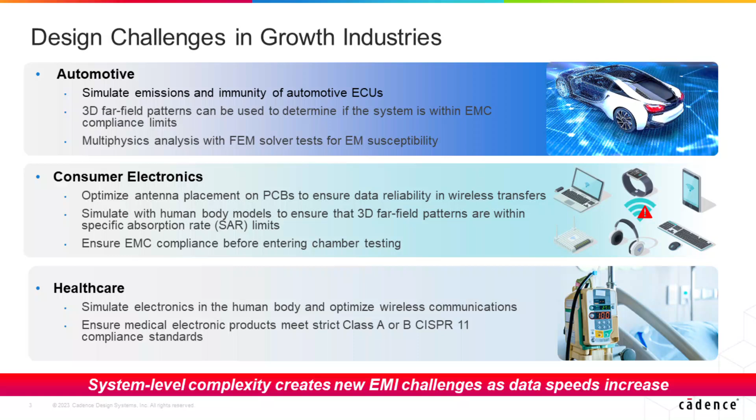Healthcare industry. Simulate electronics in the human body and optimize wireless communications. Ensure medical electronic products meet strict Class A or B CISPR 11 compliance standards. System-level modeling must advance with industry demands. So designers require new technologies for 3D electromagnetic compliance simulation.

I've heard a lot of times from my customers that they just don't have a good path to full system simulation for EMI, so they put emphasis on prototypes or pre-compliance checks. Introducing simulation would help a lot to establish a predictive EMC design-side process for analysis of EMC issues. As the outcome, of course, we would have fewer expensive prototypes.

Accelerated time to market requirements require physical prototype testing be replaced with simulation. Test measurement accuracy is required from simulators. We need scalable computing solutions. Legacy tools with old architecture scale poorly and require multiple machines with terabytes of memory to provide any level of acceleration.

It's very important to have integration with implementation tools, because if we use only point tools, this requires painful extra steps to correct design problems. Accurate, timely, cost-effective solutions are what is needed in the industry, versus inefficient simulations that take weeks to complete on expensive, dedicated hardware.

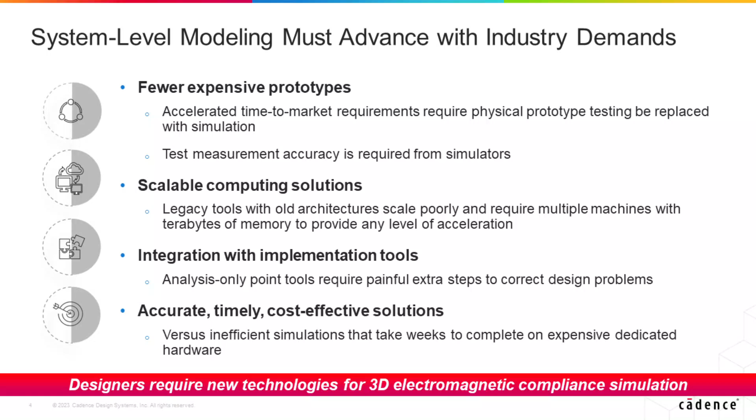Clarity 3D Transient Solver gives test measurement accuracy and extreme performance. This tool is capable of massive parallel execution: multi-threaded, distributed processing, cloud-ready. It has virtually unlimited capacity. Large system simulations can be addressed with as few as 8 cores and 1 GPU. Add more cores or GPUs for nearly linear scalability. No loss of accuracy; with all this massive parallel execution, accuracy is guaranteed.

You can see on the right side that Clarity 3D Transient Solver is used as a global solver which can address very large problems. If we look at the PCB or IC package for local field creation, we can use the Clarity 3D finite element solver, but the Clarity 3D FDTD Transient Solver is used as a global solver, which gives a good prediction of the far EM field so EMC compliance can be checked, while the near fields can be checked properly using Clarity 3D finite element.

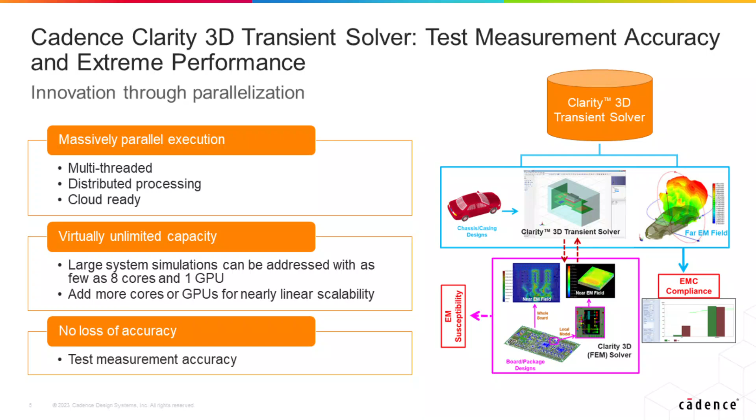Using the 3D FDTD solver, we can predict EMC and EMI problems associated with ECU designs, PCB plus mechanical chassis. We can solve various EMC and EMI problems associated with devices operating in a complex environment, including chambers, PCB boards, and much more.

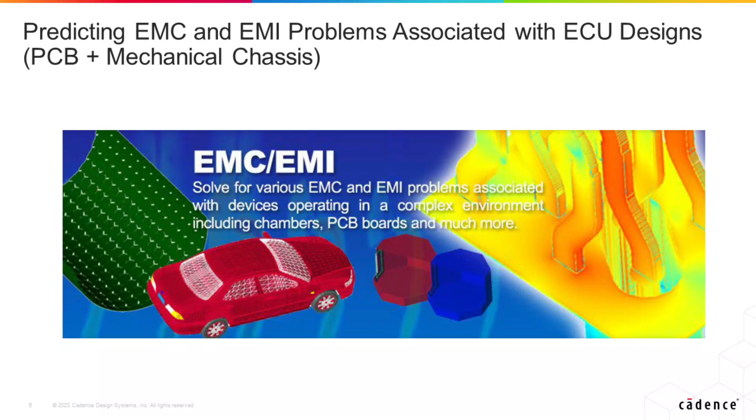I will give an example about optimizing the hole pattern for an ECU chassis using our 3D FDTD transient solver. Clarity Transient Solver was used to optimize the mechanical chassis. First, the STEP file of the mechanical chassis was imported into Clarity Transient Solver. After importing the STEP file, each part of the geometry should be associated with the proper material from our material library, which describes the electrical performance of each material defined in this system constellation, PCB plus mechanical chassis.

Here you can see a zoom showing the mechanical hole pattern originally placed on the chassis. In the first step, we will check the performance and which fields, at which critical frequencies, are leaking out through these mechanical holes.

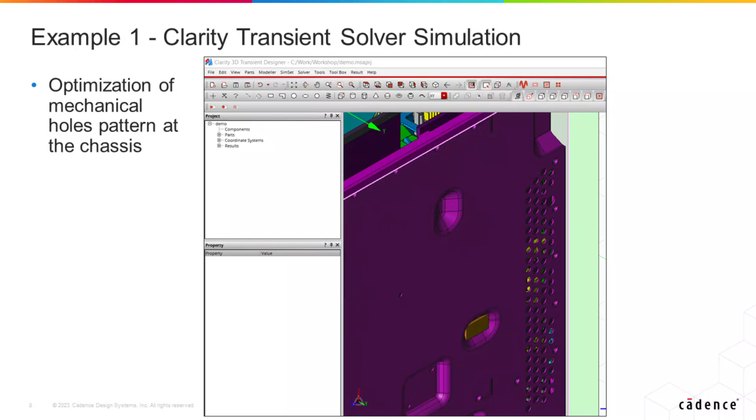On this slide, I'm showing the way I'm creating rectangles at critical component positions. So it means I have imported the STEP file of the PCB also. I can find each and every component critical position, and I can put a defined rectangle either at the PCB level, emulating the area of the critical signal switching, or at the component level, emulating electromagnetic fields which are leaking directly from those critical components.

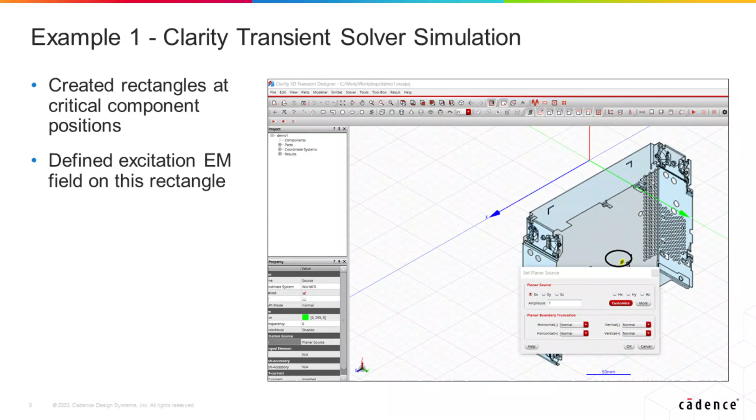So what I'm doing here, I'm defining an excitation electromagnetic field on this rectangle that I specified at a component of interest, emulating leakage, basically generating noise from that particular component. Then I introduced 6 rectangular surfaces around this mechanical chassis in order to generate electromagnetic fields on those rectangles. So those rectangles are basically used as a field output, and I just set field outputs on those 6 rectangles.

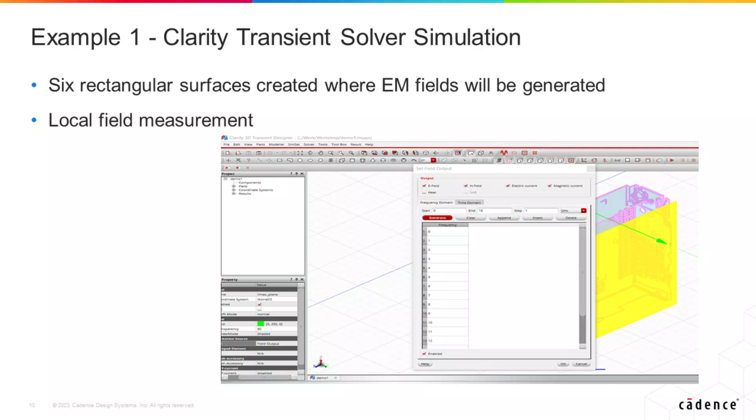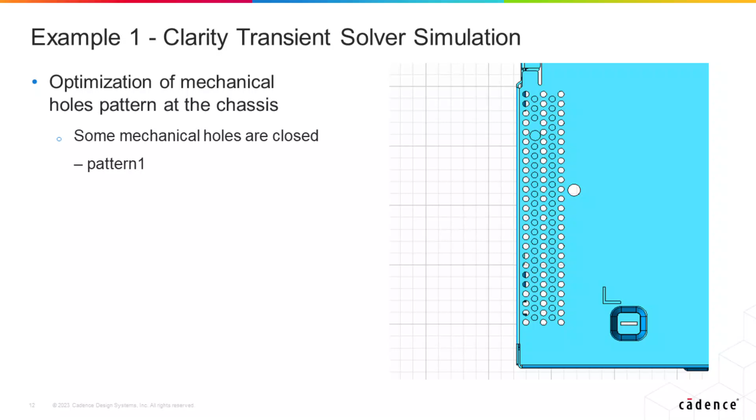So this is the example of pattern 1. Some of the holes are closed, so we have 3 lines of open holes, but the holes on lines 2 and 4 are closed. This pattern is called pattern number 1 in this analysis.

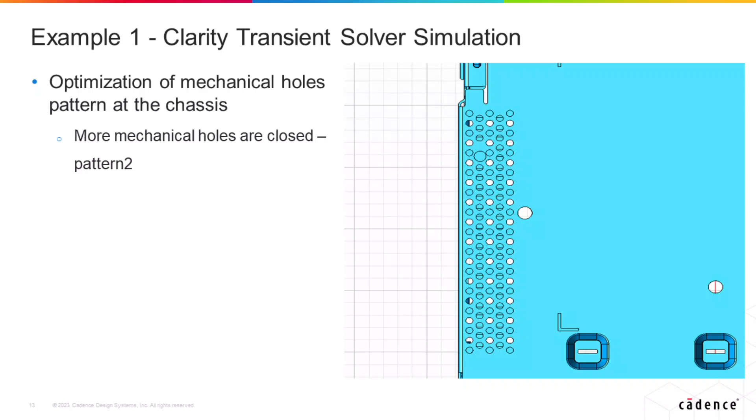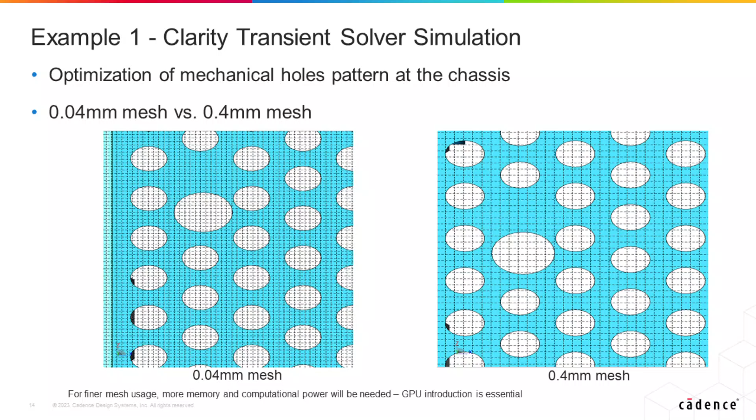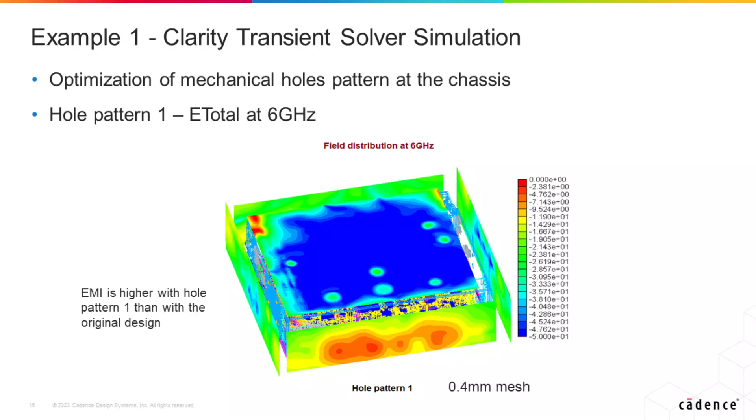So you can see the field with the original mechanical hole openings, and then we can compare that to pattern number 1. You remember pattern number 1 had stripes in the opening, so we have rows 1, 3, and 5 open, but 2 and 4 closed. So here you can see that EMI is higher with hole pattern 1 than with the original design. Okay, so we are measuring at 6 gigahertz with the same scaling, so we still have a stripe with the open holes, and we will see hot spots in the leakage field along those stripes, and this is something which will be seen in this kind of simulation.

So what we wanted to show with this simulation is that basically in advance you can work on the mechanical hole opening patterns in order to reduce the field which will leak out of the chassis. And this kind of work can be done in cooperation with thermal engineers, because they need holes for the sake of thermal. They need to cool down electronics inside of the chassis, but very often they don't think about the effects this could introduce on the leaking fields outside of the chassis.

So that means with Clarity Transient 3D FDTD, this cooperation work with the thermal team can be done successfully. Different mechanical hole opening patterns can be investigated, and in conjunction with the thermal team, at the end, we can converge on the final mechanical hole opening pattern.

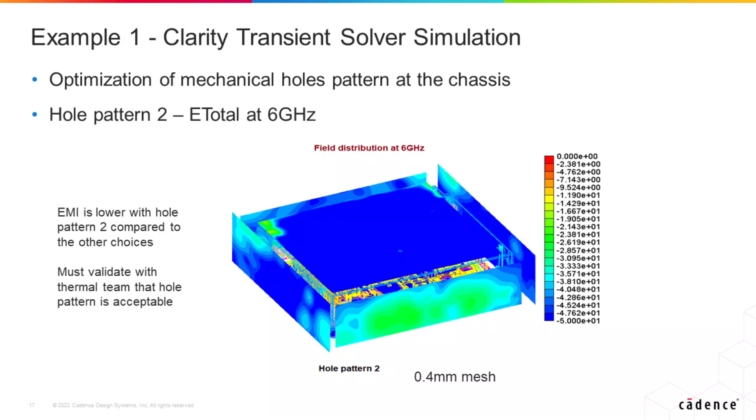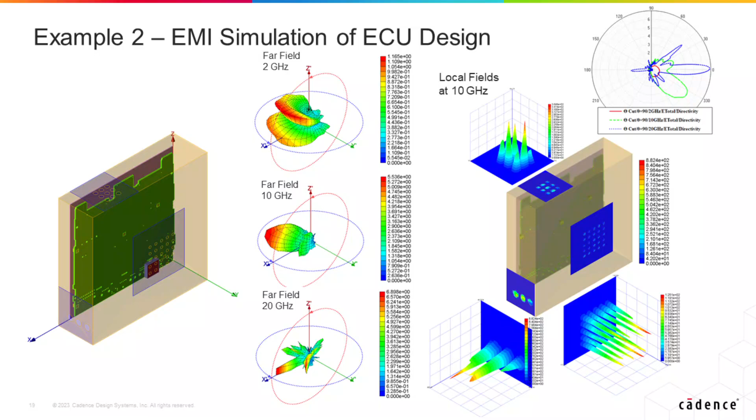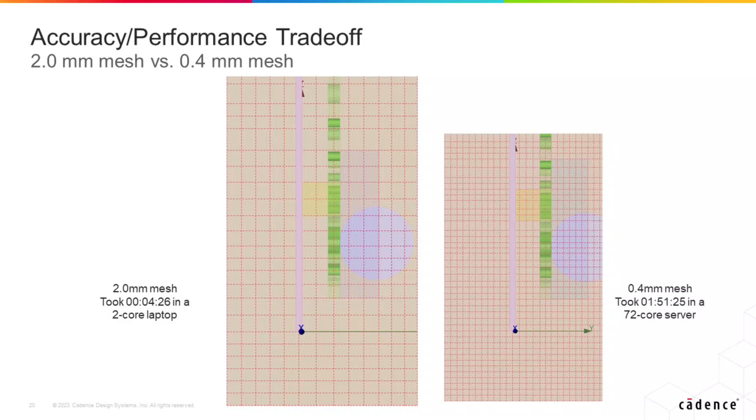So the conclusion would be that a finer mesh is needed for much more details about the far field orientations, but 2 millimeter mesh can be used for the fast assessment of the system and in order to predict: is there any particular problem with the far fields in this area?

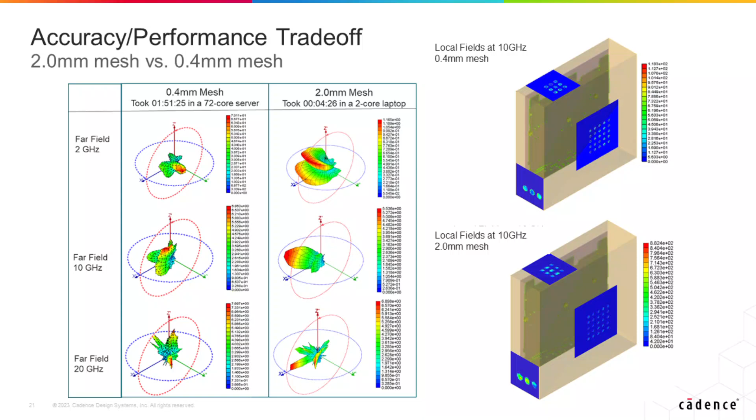Accuracy performance trade-off, 2 millimeter mesh versus 0.4 millimeter mesh. So you can see the local fields at 10 gigahertz. Those are the near fields. So with a finer mesh of 0.4 millimeter, you can see a leakage through each and every hole respectively. And you can definitely make a judgment how big is the leaking field, and you can compare this kind of simulation to the measurement.

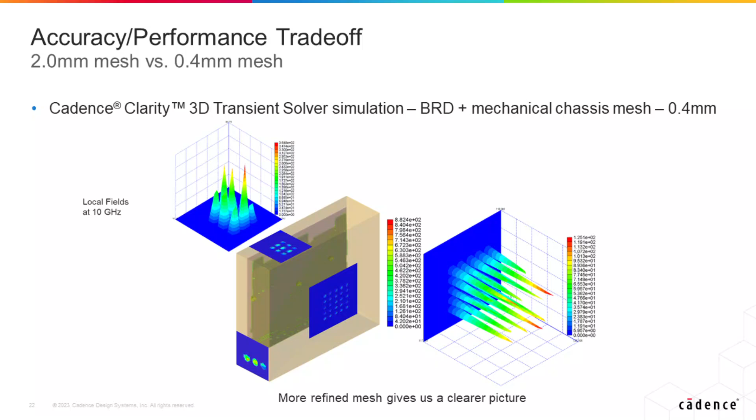Analysis summary. Cadence Clarity Transient Solver was used for the analysis of the ECU system to capture emissions leaking out of the mechanical chassis at all critical frequencies. With a detailed mesh, critical frequencies correlate very well with the measurement results. A less detailed mesh can be used for quick assessment, but detailed analysis requires computational power, eventually GPUs. The mechanical hole patterns creating leakage problems were simulated and optimized.

Cadence Clarity Transient Solver can predict potential EMI problems of a complete ECU design, PCB and chassis. EMI engineers should closely work with thermal engineers to optimize mechanical hole patterns in the chassis. Cadence Clarity 3D Transient Solver, together with Celsius Thermal Solver, can help create an optimized system.

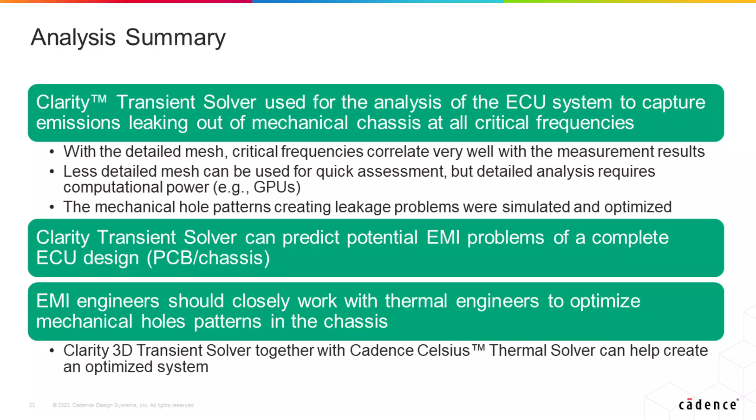Using GPUs to accelerate EMC analysis. GPU acceleration and CUDA. Modern GPUs have evolved into highly parallel core systems, allowing very efficient manipulation of large blocks of data. Compute Unified Device Architecture, CUDA, is a parallel computing platform and API model created by NVIDIA. 3D FDTD is well suited for GPU due to its ability to segment the problem and parallelize the solve. We implement these GPU targeted functions in the 3D FDTD engine code to speed up the simulation.

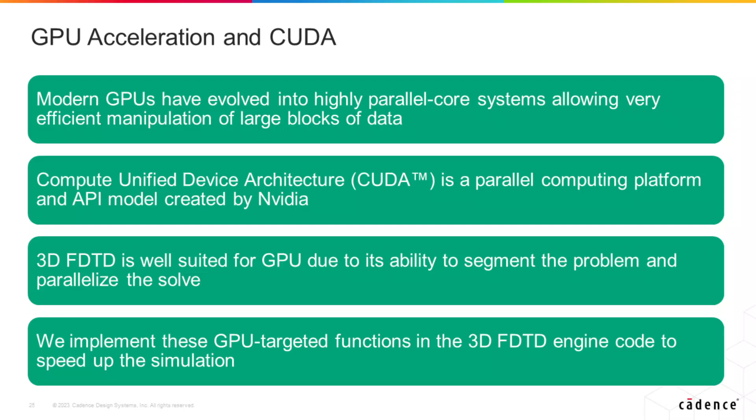Inside Clarity 3D Transient Solver, using GPUs to accelerate EMC analysis. First, we'll start host code. Then copy input data from CPU memory to GPU memory. Then we will load the GPU program device code and execute, caching data on chip for performance. At the end, copy results from GPU memory to CPU memory.

So here you can see some benchmarking on the GPU server. It's Red Hat 7.6. It's NVIDIA Tesla, by 4, each 5,120 cores. So you can see the characteristics of CPU, CPU memory, GPU memory. And then if we compare the GPU versus CPU case for very big cases, we can see that simulation time using 2 CPUs and 40 cores can be 12.5 hours, and with 4 GPUs, we can basically simulate it in half an hour. So 4 GPUs versus 40 cores of CPU is about 25x speed up.

Can you imagine if we have just a 10 times speed up of our ECU case just using the GPU? That means instead of just introducing, analyzing and optimizing 3 hole patterns, we could do 30 different patterns using GPU in the same amount of time. So it's definitely crucial to use a GPU to speed up this kind of 3D FDTD simulation using our Clarity tool.

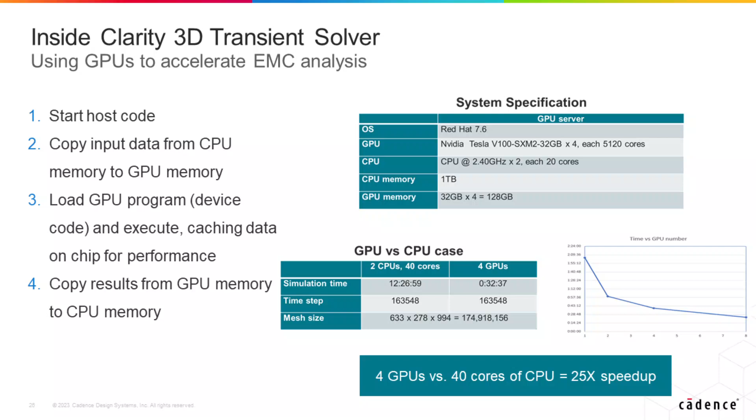High-performance computing has transformed both the basic and applied sciences over the last few decades. Traditional high-performance computing domains like computational fluid dynamics and molecular dynamics have benefited profoundly from advances in hardware and software, and the impact has been felt in areas as diverse as drug discovery, weather forecasting, and manufacturing. More recently, artificial intelligence has been paired with HPC to enable high-accuracy models at low computational cost. Many breakthroughs in HPC today use NVIDIA hardware and software, and NVIDIA often collaborates with academic and industrial researchers to enable high-impact work. Much of the improvement in HPC performance over the last decade has come from massive parallelism.

Limits on per-core processor performance have prompted many companies to increase the number of cores that they can fit on a chip, and NVIDIA has been a leader in this domain over the last 2 decades. Applications that can express large amounts of parallelism benefit from these newer processor architectures.

In the paradigm of accelerated computing, a standard CPU handles program control flow and other serial parts of an application, and the parts of an application that can run in parallel are offloaded to an accelerator. This enables a substantial opportunity for improvement in application performance, though it does require developers to clearly identify and expose parallelism in their application. NVIDIA provides several convenient ways to target accelerated computing platforms.

Of course, if you have a problem that uses standard math library interfaces, such as BLAS or LAPACK, NVIDIA provides GPU-accelerated math libraries for drop-in acceleration, following the standard advice to use the vendor libraries where possible. If you need to adapt your C, Fortran, or Python source code to target GPUs, NVIDIA provides several programming models at different levels of abstraction.

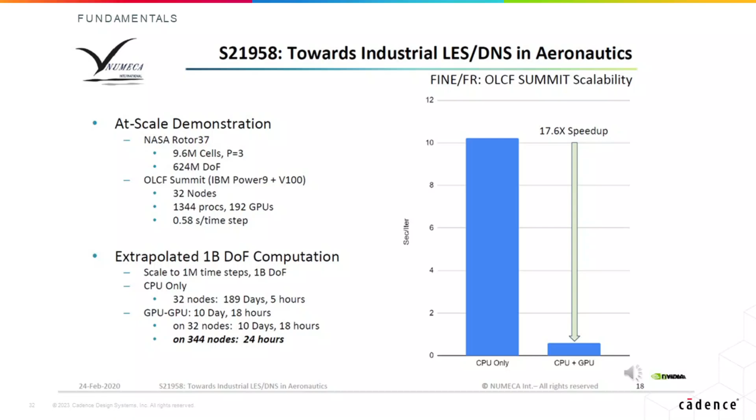A use case that would take half a year using only the CPUs on 32 nodes could be done in only a week and a half when additionally using the GPUs. And because Summit has thousands of GPU-accelerated nodes, the same problem could be solved in as little as a day by going to larger scale. Problems that were once considered hero calculations on standard CPU nodes can approach being normal workday jobs when taking advantage of GPU acceleration. Cadence also takes advantage of GPU acceleration for Allegro.

While many aspects of the system design domain, such as electromagnetic field simulation, are classic parallel HPC problems that can benefit from using GPUs, GPUs shine in other ways too. Allegro uses GPUs for smoothly and quickly rendering the board, enabling faster iteration during the design process. Additionally, machine learning calculations, themselves being a deeply parallel problem, can be done at high performance and with strong power efficiency on NVIDIA GPUs, and Allegro uses this quality of NVIDIA's GPUs to enable placement and routing on the board.

NVIDIA technology makes it quite easy to use GPUs for machine learning problems. The popular deep learning frameworks like TensorFlow and PyTorch are GPU accelerated out of the box. NVIDIA provides high-performance Docker containers on ngc.nvidia.com with optimized implementations of these frameworks for both machine learning training and inference. With these reference implementations, you can get both best-in-class performance and extreme simplicity and ease of use, as well as the guarantee of reproducibility of your work.

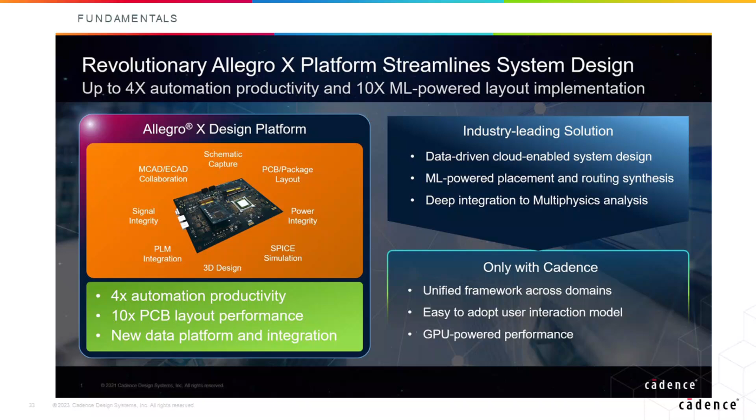I mentioned earlier that HPC is a full-stack problem. NVIDIA is committed to this vision and supports all aspects of workstation and data center HPC and AI usage. NVIDIA Quadro GPUs enable state-of-the-art calculations on high-performance workstations for rendering workloads, data science calculations, and generally problems requiring large amounts of memory. NVIDIA worked closely with our partners in the consumer gaming and enterprise workstation markets to enable excellent system design. And NVIDIA also offers the DGX Station A100 for the most demanding AI workloads in a workstation environment that fits under your desk.

NVIDIA's data center GPUs, such as the Ampere A100 GPU, are the most powerful accelerators available for server-class high-performance computing and AI. NVIDIA's OEM partners in the enterprise server space incorporate NVIDIA GPUs into both their standard and high-end designs, and NVIDIA collaborates deeply with these OEMs to ensure that the end user will have a great experience. All NVIDIA certified server designs have been carefully validated to ensure compatibility with GPU-accelerated HPC and AI workloads. In addition to our partner offerings, NVIDIA DGX SuperPOD is an AI supercomputer solution for organizations that want a known good reference architecture that enables the best possible AI performance.

Right now, we're in the midst of an explosion of use cases for HPC. Extreme scale HPC is no longer the domain of only government labs. Rather, industry can take advantage of HPC to solve many important classes of problems. HPC systems are regularly finding new uses. For example, the COVID-19 pandemic resulted in a great demand for HPC systems in areas like molecular dynamics and drug discovery. Particularly, a trend that is worth paying attention to is the convergence of HPC and AI.

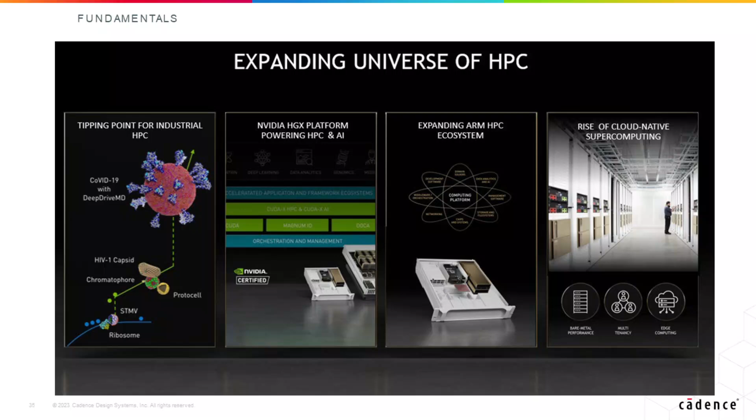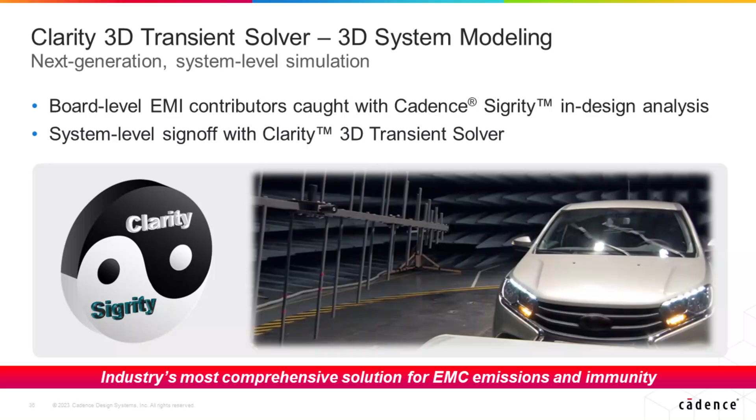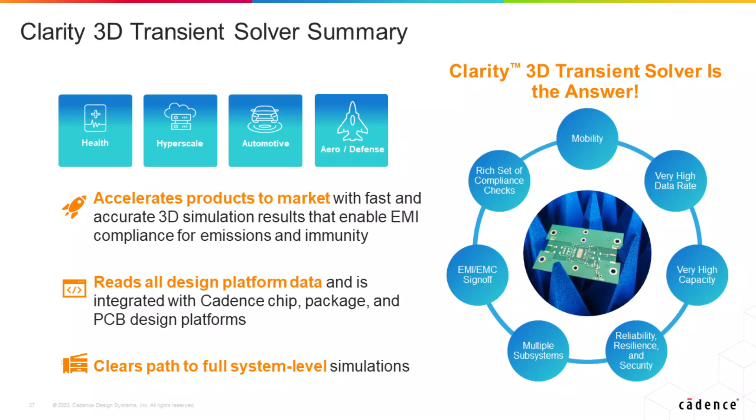Clarity 3D Transient Solver summary. Accelerates products to market with fast and accurate 3D simulation results that enable EMI compliance for emissions and immunity. Reads all design platform data and is integrated with Cadence chip, package, and PCB design platforms. Clears the path to full system-level simulation. Thank you for attending.